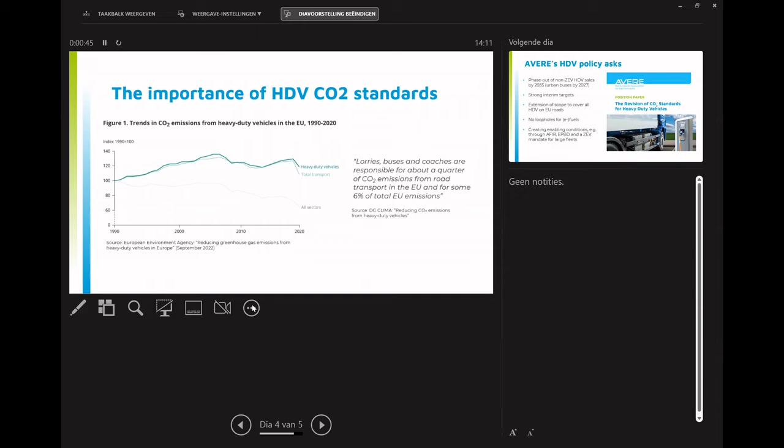But why are we talking about heavy-duty vehicles, and why do they matter so much? Well, basically, if we look at the EU's climate targets, they are quite a significant share of emissions, and we want to address this chunk and get to zero emissions in 2050, right? Transport in general accounts for roughly a quarter of EU emissions. And of the total emissions for road transport, heavy-duty transport is actually a quarter of those. So it's quite a significant chunk. Overall, if you look at EU greenhouse gas emissions, it's about 6%, which is quite significant. It's 1 in 20, basically,

emissions that come from heavy-duty transport. And if you look at how this has been developing in recent years, and this is from a recent briefing from the European Environment Agency, you see that there is an increasing trend in emissions from heavy-duty road transport. That's basically because despite efficiency improvement on the individual truck level, there's just more of them on the road. There's increasing demand for road transport. And so, with the exception of a slight dip through the COVID pandemic, these emissions have actually been on the rise.

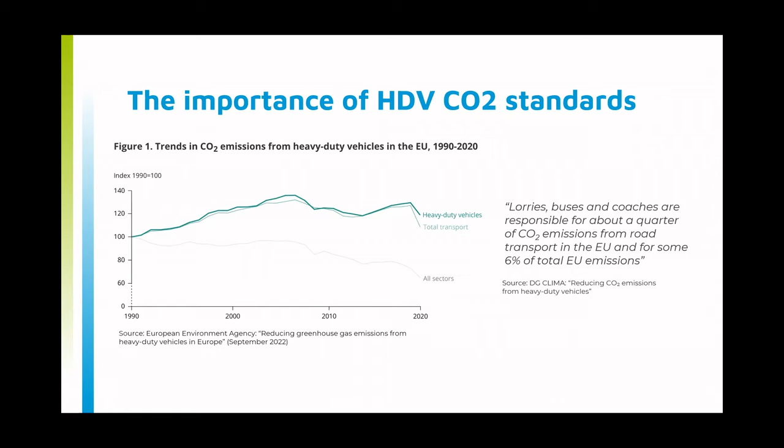And therefore, just very briefly plugging our policy asks for the upcoming heavy-duty CO2 standards, and we will then debate with all of you whether these are feasible asks, whether we need to go even quicker, or whether this is maybe too ambitious. But we are calling as AVERE for the phase out of non-zero emission HGV sales by 2035 as the target year, because vehicles sold today often remain on the road for 15 years, depending on the truck class. Looking at the vehicle in use statistics, we see an average of 15 years for new trucks, and therefore 2035 is when we should phase out to reach 2050.

We want strong interim targets on the way to achieve scale in the market quickly. It's important to also extend the scope, right now covering heavy lorries mostly, but buses and coaches need to be included, also smaller trucks, so that all these vehicles are decarbonized.

We want no loopholes for synthetic fuels, just because it complicates regulation and because these fuels are expensive to produce, scarce, rely on renewable energy for production, which is also scarce, and are more urgently needed for sectors such as aviation and shipping. And then lastly, besides these ambitious standards, we need flanking measures, and we'll later hear about AFIR.

You've all seen that there has been a vote today in plenary confirming the ambitious trajectory that Rapporteur Ertug and his colleagues had proposed. But also the EPBD, the Energy Performance of Buildings Directive, truck depots, for example, logistics hubs, can contribute on the charging side.

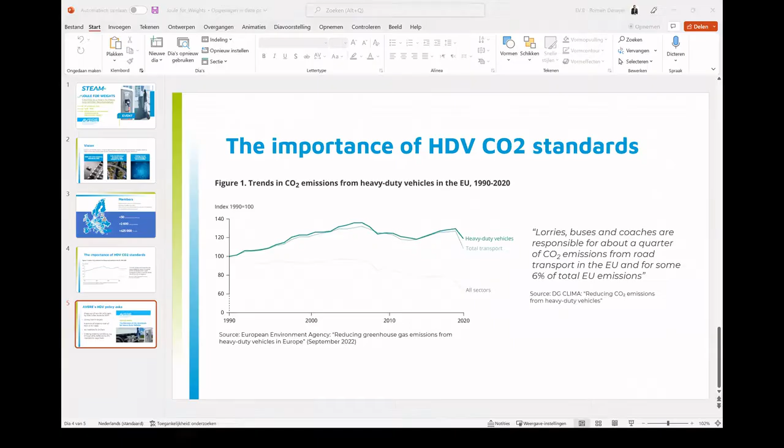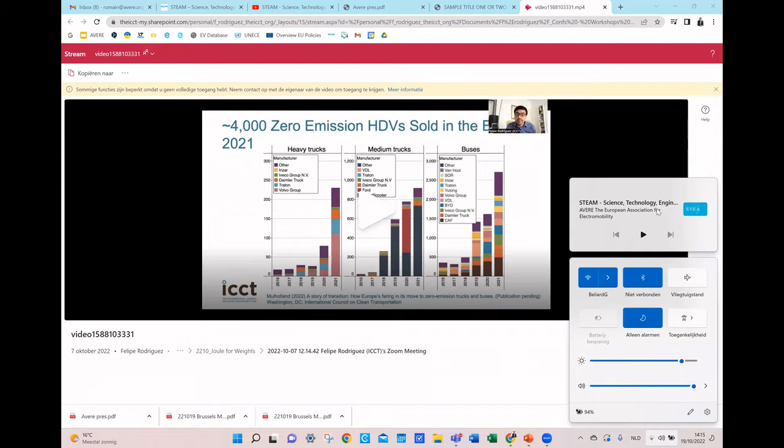Try another video first. I think we have to put out the mic. This was... Try the STEAM video first. Yes. Okay, second try of the STEAM video. Let's see. No. Okay, let's change. Okay, let's.

Right, so that's the mystery around STEAM also solved. Science, technology, engineering, arts, mathematics. And now that we have got that, we can now jump to Mr. ... Yes.

Hi, my name is Felipe. I am the Heavy Duty Vehicles Program Lead at the ICCT. Thank you for the opportunity to present today in this important venue. It is unfortunate that I couldn't make it in person to Brussels, but I bring to you this pre-recorded presentation on the 5 key policies that are needed to decarbonize the heavy-duty vehicle sector in Europe. So allow me to share my screen and a short presentation on what these 5 policies are.

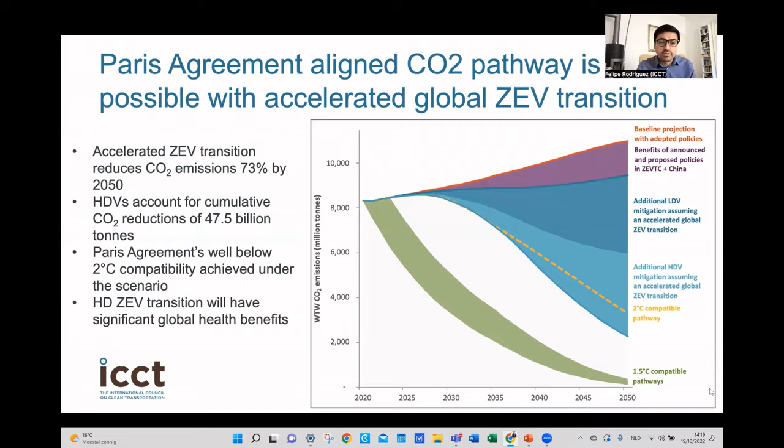And what we find is that an accelerated transition to zero-emission vehicles plays a significant role and can align the global economy on a pathway that is complying with that objective of well below 2 degrees Celsius. But the key message that I want you to keep from this figure is that heavy-duty vehicles can contribute at the same level as light-duty vehicles in this transition. Therefore, we need to put more emphasis on trucks and buses and the electrification of these heavy vehicles if we are to live in a future where climate and global warming is not a threat to humanity.

So let me start with what is the situation in Europe today, up to 2021. You have here 3 different segments of vehicles. We have heavy trucks, medium trucks, and buses. For heavy trucks, we see that the transition is really in the early stages, registering somewhere between 200 and 250 units in the EU 27 countries.

Keeping in mind that the heavy truck market is hundreds of thousands of units, right? So it is still less than 0.1% that we have. For medium trucks, it looks a bit more promising. You have here a lot of green color in the medium truck segment. And I will tell you why Germany has had such a prominent role in the transition to

medium electric trucks. And for buses, you see that the transition has happened or is happening at a more accelerated pace. Electric buses now represent over 10% of the new vehicle bus market. And that share continues to keep increasing.

So if we look at what manufacturers are doing, we see that in the heavy truck segment, Volvo Group, Volvo Trucks has taken the early lead in commercializing many of these vehicles under both brands, right? Volvo Trucks and Renault Trucks. But the future remains uncertain about who is going to take the leadership here, as manufacturers have announced ambitious targets for 2030, 2035, and 2040. And we're going to get into those in a second.

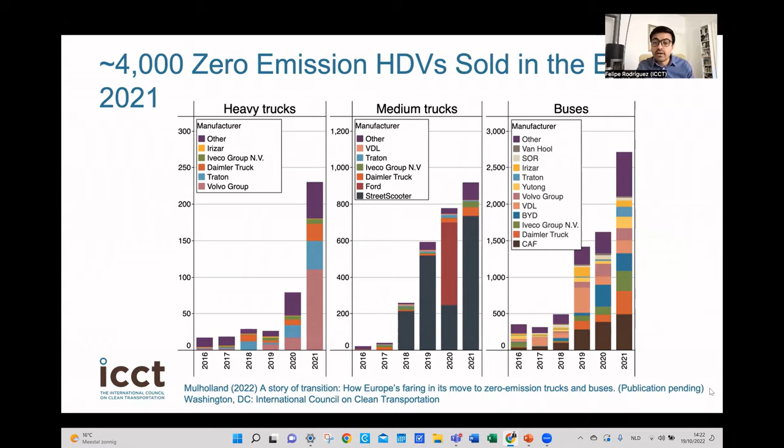For medium trucks and buses, medium trucks is interesting because the market was single-handedly developed by one company called StreetScooter in cooperation with the Deutsche Post. And that was like an example of a market failure of established manufacturers not taking an opportunity to commercialize electric trucks. And here Deutsche Post had to go and fund a startup, StreetScooter, to be able to get access to those vehicles that established manufacturers were not producing. And on buses, you see that we have a bit more diversity on the supply of electric buses, which is quite promising and increases competition.

So now let me jump into the 5 key policies that we have. The first and perhaps one of the most important policies are phase-out targets. So phase-out targets are political decisions that are taken by a government setting the long-term goal for banning the combustion engine and phasing in completely electric powertrains. We have seen a lot of this happening in California, for example, something enshrined into regulation, not only setting a phase-out target, but also intermediate targets for the transition. I'm going to get to the point of intermediate targets and why they are so important.

But at the global level, we see that the most important initiative that we have today is the global Memorandum of Understanding, the MOU that several countries have signed: Austria, Canada, Chile, Denmark, Finland, Luxembourg, Netherlands, New Zealand, Norway, Portugal, Scotland, Switzerland, Turkey, United Kingdom, Uruguay, and Wales. And they set a goal of achieving 30% market penetration for zero-emission trucks by 2030 and a full phase out of the combustion engine, complete transition to electric trucks by 2040.

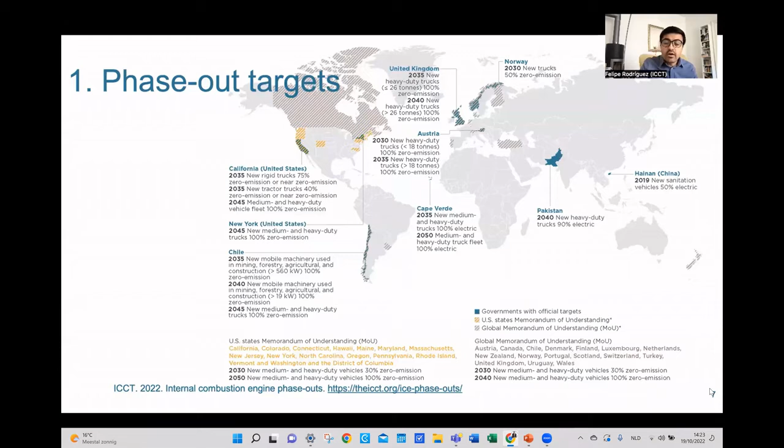Now, these phase out targets set the long-term goal, as I mentioned, but they need to be enforced by other types of policies that have more teeth, basically. In the European Union, that policy is the CO2 standards for heavy-duty vehicles. The first round of CO2 standards was adopted back in 2018, 2019, and it sets a 15% CO2 reduction by 2025 and 30% CO2 reduction by 2030. This is averaged across the fleet and across all vehicle segments.

This regulation, and this is what you can see there in that black line at the top, was set on the technology potential of internal combustion engine technologies. That is, the regulation did not consider back then a significant role for electric trucks in decarbonizing the economy. But what happened after that is that manufacturers, realizing that this 30% target was coming, did react by announcing ambitious strategies to transition to electric trucks. And this is what you can see on the right-hand side of the slide. We have here an area plot where you have the different manufacturers and the different commitments they have made to transition to 100% electric trucks, or a significant percentage in the coming years.

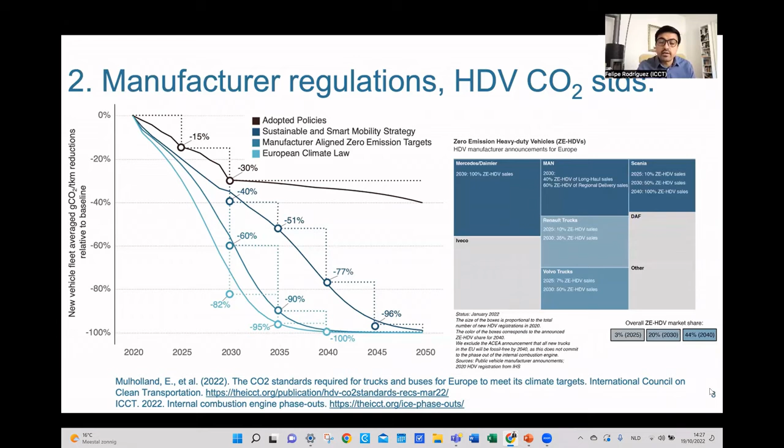But that's talking about the supply side of the equation. How do we make sure that manufacturers really deliver on their commitments, right? And this is the goal of CO2 standards, setting in stone those commitments and creating not only the carrots, but also the sticks for manufacturers to deliver.

Now, what happens on the demand side? On the demand side, there are important fiscal regulations that are being adopted in Europe. One of them is the Eurovignette directive that was revised recently, that sets two policy levers that could increase the attractiveness for operators to buy zero-emission vehicles. The first is a carrot. The carrot that this Eurovignette directive provides is a road toll reduction for zero-emission vehicles, in the form of up to 75%.

And what we have done at the ICCT is to try to model the impact of that policy on zero-emission, in particular battery electric trucks, achieving cost parity, TCO parity with diesel trucks. And what we see is that the policy can bring forward that cost parity with diesel by roughly around 5 years, right? This is highly dependent on the cost of road tolls. But taking the case of Germany as the most important example, Germany currently has 100% exemption of the road toll, and that policy can bring the TCO parity forward 5 years to something like 2024.

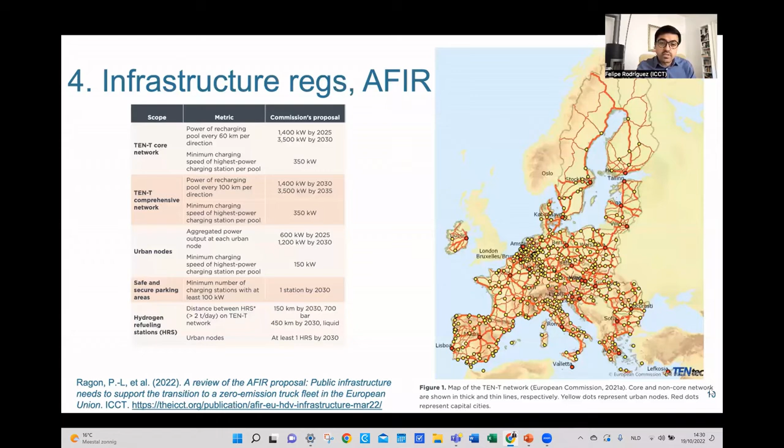And last but not least, we need to talk about fleet procurement regulations. I think globally, the most important one happening right now is what is being done in California with the Advanced Clean Fleets regulation, still being discussed. This regulation would set targets for private fleets to buy zero-emission trucks. In Europe, we are not that far. We're talking about only targets for public procurement under the Clean Vehicles Directive.

So these are the 5 policies: phase-out targets, strong regulation, either CO2 requirements or CO2 performance regulations that have intermediate steps, fiscal regulations and incentives to drive demand, charging infrastructure regulations to ensure that the chargers and the hydrogen infrastructure are there, and last but not least, purchase requirements to align the supply of vehicles with the demand for them.

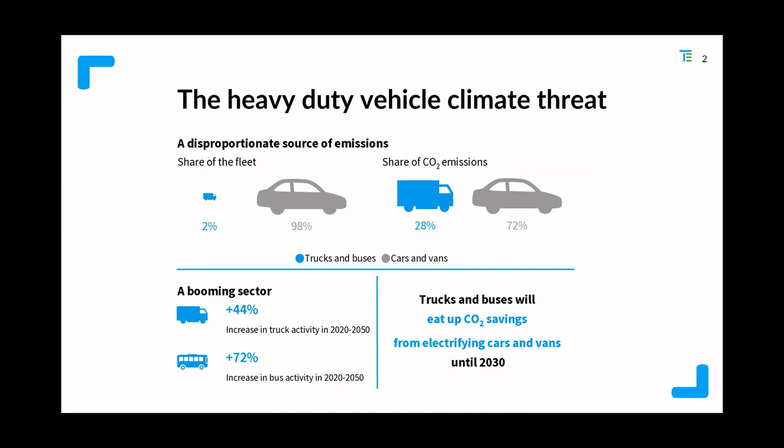So as Thomas already outlined, and also Felipe, we have a heavy-duty climate problem in Europe. If we don't change the sales trajectory for trucks, then we will see a 44% growth in activity, which will go together with growth in emissions, and actually the pollution from trucks will undo all the emission savings from light-duty vehicles that we just fought so hard for.

So Thomas already explained nicely why the focus is being set on 2035, also at Transport and Environment, because trucks stay on the road 15 to 18 years. So if we come back from 2050, which is the deadline to be net zero in Europe, then you land around 2035. So apart from the climate point of view, at T&E we wanted to look at: is 2035 also feasible? So we commissioned a study from TNO, which is a Dutch consultancy, to look into when zero emission trucks would have lower total cost of ownership than diesel trucks, while performing the exact same operational requirements. So the same payload over the same time and delivering the same range.

And so you can see here on the slides the results. And so what we see is that in 2035, 99.8% of freight trucks, and by freight trucks we mean small, medium, and heavy-duty vehicles, but not vocational vehicles, 99.8% would beat diesel in 2035.

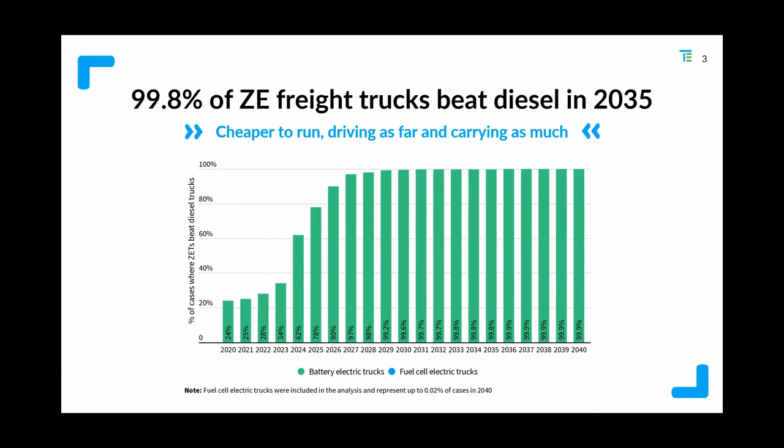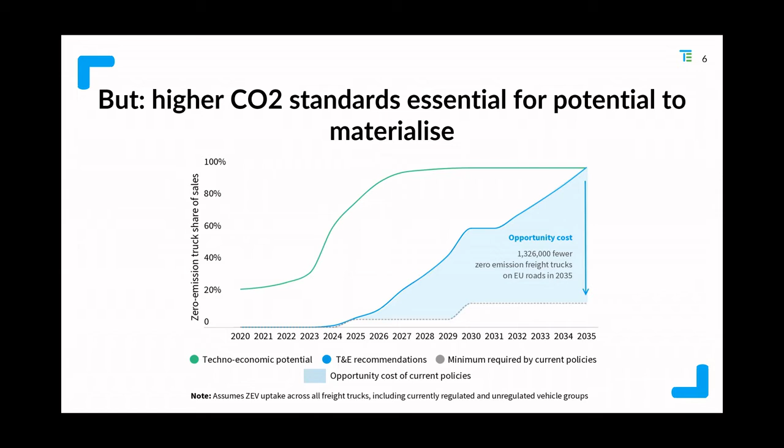And I am very happy that we have here today Michael Lohmeier, who is Vice President for Clean Operations at Deutsche Post DHL. And he'll tell us a bit about the perspective of users. So, the floor is yours. Thanks for joining us. Thank you.

At least of one user, right? Well, I couldn't invite all. Would have been a bit crowded. Yeah, sure. So I try to be as broad as possible. Yeah, thanks for the invitation and for the possibility to share our thoughts.

I have only 2 slides with me, so I'll try to explain them quickly. First of all, what I don't have with me, but I would like to share, is that we have a company target, which is 30% or more than 30% until 2030 in line hauling CO2 reduction. So we communicated this already last year in March.

So we did a lot of calculations, as you can imagine, but we also took into consideration, coming back to what I've heard before, what we need to comply with the Paris target. So we applied also for the Science-Based Targets Initiative, and out of this, broken down top down, we received a target for the trucks, and that means that we need at least 30% sustainable fuel or whatever fuel CO2 reduction on the road with our big trucks.

And we have, by the way, for the smaller ones, for the vans, a 60% electrification target on the last mile, which is not maybe the biggest discussion today, but also worth mentioning. When we discuss trucking with all countries and all continents at the moment, there are also good situations, mentioning the Americas market, where we still have 9 cents per kilowatt hour. So when we talk about an electric vehicle or an electric truck, that's a positive business case, maybe not for the truck, but for the van, definitely as of today.

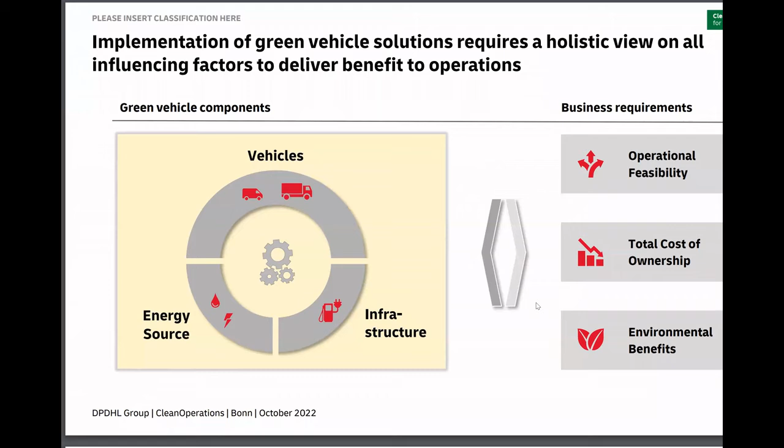So there's a lot of things to do. Happy to hear later more about that from Volvo. But I think that's the direction it goes at the moment. But nevertheless, the good story is that this driving profile and this kind of vehicles are already in our fleet, which have not been before over the last months and years.

So when we did the strategy, it was not part of the strategy. We mainly focused on the small ones. Mentioning also the medium-sized vehicles: there is no electric vehicle at the moment in place for us from an operator's perspective. Not fully understandable, because these were the ones we could easily drive. They drive 100 to 120, maybe 80 kilometers a day.

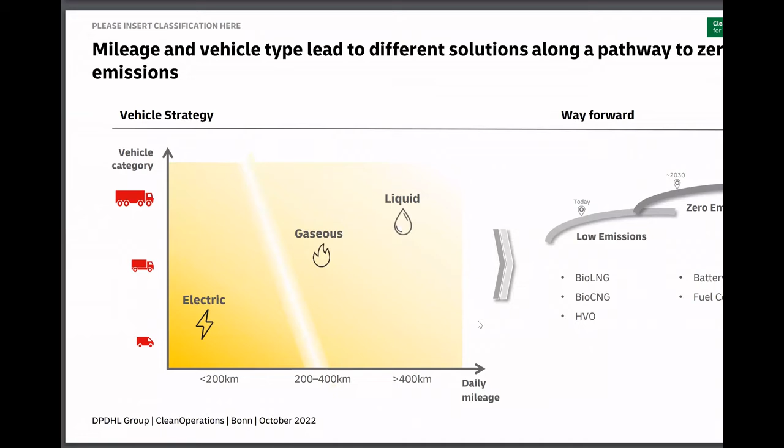And then in the next step, zero emission, we have the battery electric truck then in place, but we really count on the low emission pathway to zero emissions until 2030 as well, which is really important from our side to follow. So that would be quickly the operator's view. Thank you.

Thank you very much. And I guess I don't need to say that much to set up the next presentation, because I think the challenge has been set. We've heard about the climate needs, we've heard about the user needs, and basically you've just been directly challenged in terms of delivering structures suited to more use cases. So Mr. Anders Berger is Director Public Affairs at Volvo Group, and really looking forward to hearing your response.

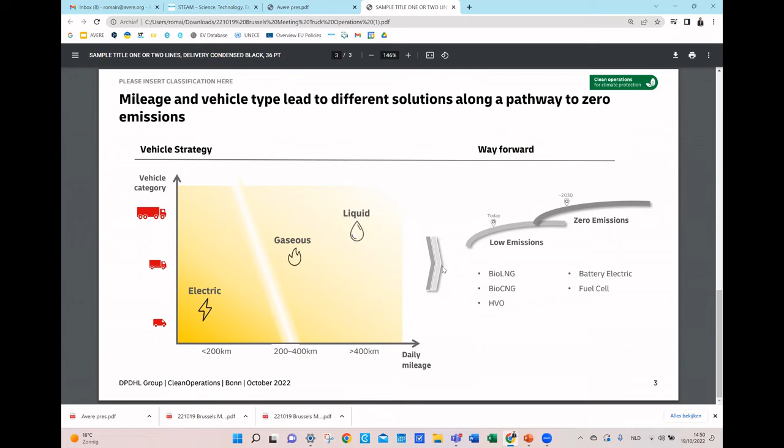And policy, as you will see from my presentation, plays a vital role in the transition from what we have today all the way to meeting the Paris Agreement. I work out of Gothenburg, the head office of Volvo Group. I will, for this presentation, talk about the truck side of Volvo Group, which is in European context, Volvo Trucks and Renault Trucks. We have other business areas, but they will be presented in other presentations.

So this is our story. This is our strategy, our roadmap towards meeting what is important to us. And that is meeting the Paris Agreement, net zero by 2050. It's not zero emission per se. Zero emission is the most important tool in that journey, but it's not the only tool. We cannot disqualify other means of getting there and using whatever we have that qualifies as net zero. So that's important.

But as you see, the new dominant design for trucks will be electric. There's no question about it. The whole industry is geared to it. I hope some of you had the opportunity to be at IAA in Hanover a couple of weeks ago. It was all electric, 80% battery electric, 15% fuel cell electric, and 5% low emission fuels, you could say. But it was extremely evident. So the electric driveline is what is going to replace the diesel engine to a large extent, and it's going to be a mix of battery electric and fuel cell electric vehicles.

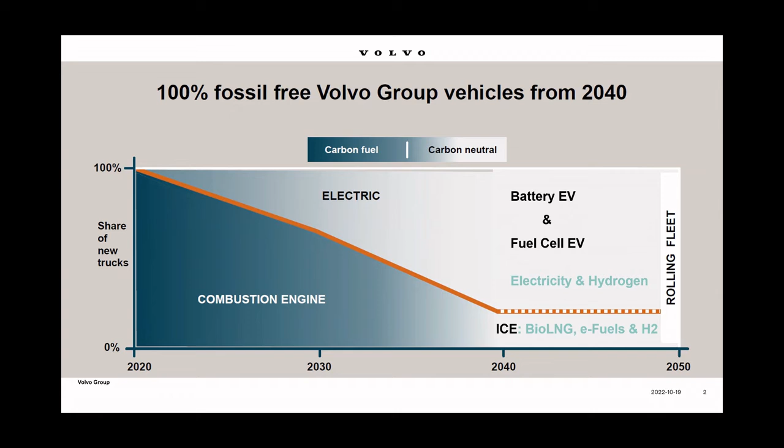So we need to sell fossil-free vehicles by 2040, then we have 10 years to replace the fleet. You mentioned 15, 17. In actual terms, if you look at where the transport work is done, it's done by vehicles with less age than 10 years. So we have a tail of old vehicles, but they're not really that important. This is the other part of that story.

This is explaining why, because we see the demand in terms of energy usage, yearly, but I would say also daily mileage, because daily mileage is very important when it comes to how we're going to solve the transport operations that Michael just described. Annual mileage is actually good for most technologies, because the more miles you drive, the more you can pay off the higher investment costs.

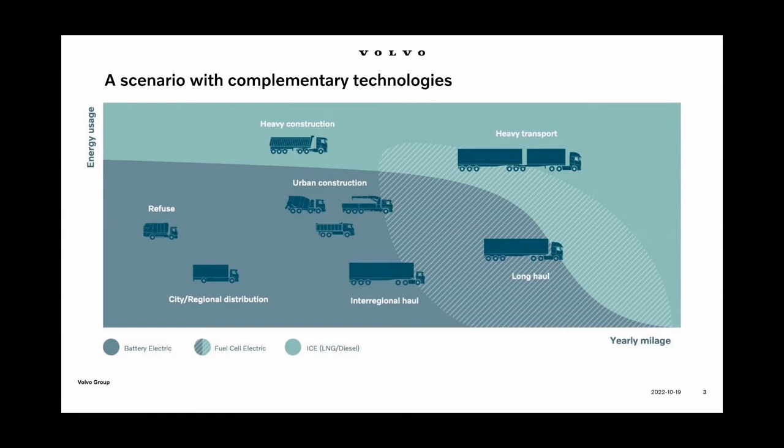So one challenge with distribution trucks in cities is the low annual mileage. The challenge with many vehicles is the variance in daily mileage. And for some really heavy applications, in parts of Europe where we will have extremely high costs of building charging infrastructure or fuel cell infrastructure, we see again that there will be room for net zero carbon-free fuels in a combustion engine. And I'll just take you through the journey that we are on now.

It's been stated that we are the market leader, and that's correct. I can confirm. We have sold some 3,000 Volvo trucks and 1,000 Renault trucks now, heavy-duty battery electrics. We are in series production. And we are learning together with the customer, because this is not replacing trucks. This is changing an entire transport system.

And the challenge is exponential compared to going from Euro 5 to Euro 6 or to post Euro 6, when it's only a truck issue. This is transitioning an entire transport system. So we're learning. This is, I think, globally the biggest project, where together with Scania vehicles and Volvo vehicles we're following 60 different flows.

And I hope you recognize the vehicle up here, Michael. You know that vehicle, of course, yes.

So it's a 64-ton combination in line schedule between Jönköping and Gothenburg, doing distribution rounds during the day and then line scheduling through the night. So we're learning together with customers, because this is so much more than just replacing the vehicle. It's understanding all the operational features of logistics. It's understanding what is an adequate charging strategy for this particular route, and how we can solve the charging needs.

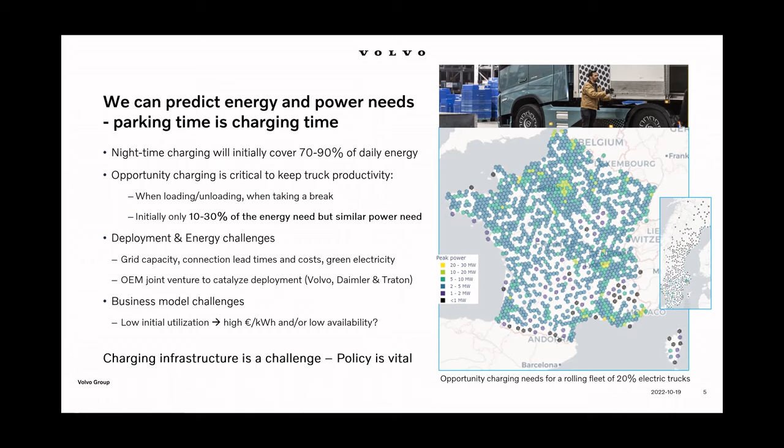Last slide, and the main argument for why we don't approve of a 2035 100% ICE ban, which is actually what Sofie was stating. We believe that if we were to serve all heavy-duty trucks, there will still be need for sustainable biofuels for some time. I would be happy if the TNO report applied to all trucks in Europe, but it doesn't, unfortunately. It applies to 70% of the trucks in Europe, the 4x2 tractors. 30% of the trucks in Europe are not accounted for in the TNO report.

And taking our own goals, Volvo Trucks state that 70% of truck sales will be electric by 2030. And taking 99% out of 70% is fairly close to 70%. So I think we are fairly in line, actually, if we moderate the TNO results down to reality. And then for us, again, it's net zero that is the challenge, not zero emission, because zero emission can be extremely costly if we drive it too far and do not utilize the other options we have in order to reach net zero.

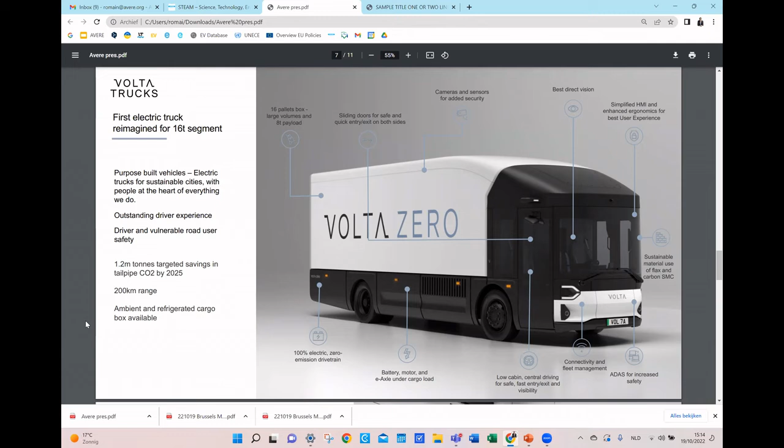One point that I didn't mention, that is also something that we battle for, is to attract more women to the industry. So 2% of drivers are female, and I think operators are definitely suffering from that, added to an average age of 55 years old, roughly, in Europe.

But the idea is that we manage the project from understanding what the needs of customers are. And going back to what you were saying, sometimes we think I need fast chargers when actually the need is depot charging by night, so it doesn't require this big pool of energy. We do all of the civil engineering, installation, maintenance, and provide the full suite of services from insurance, driver training, which I heard is a key pain point, maintenance and service with what we call the third-party service agreements with companies such as TAPs, Bosch, ZF, financing, insurance, and of course, charging infrastructure. So we think this is the how, how this is going to happen.